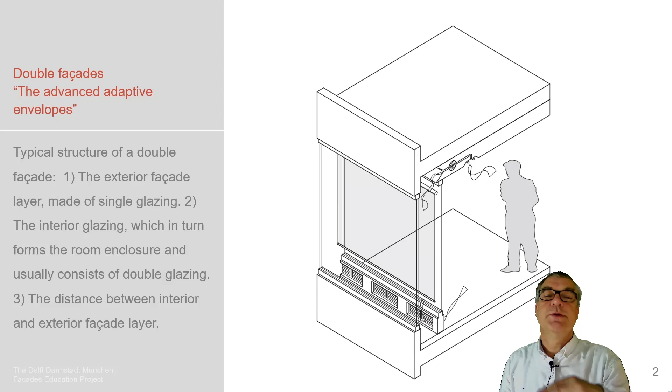The main idea is to have an outer layer, mostly a single layered glass layer, to create a buffer for an inner double-layered facade to prevent too much air movement, so that sunscreen systems could be simpler and easier positioned as one aspect, and as a second aspect to be a kind of glass house trap for sun, especially in the in-between periods, to allow a heat up of this inner cavity and then having this heated up air being used in the building as a system. This is the main idea of this type of facades.

We obviously have a history with that. The box window, here a sample from San Sebastian, which are small balconies made out of single layered outer layers of glass. Then there's an inner window, also a single layered inner window. And similar to what I explained for the modern double facades, this is used as a glass house trap to have sun heating up the in-between cavity, the in-between space, and then having this tempered air to be used at the inside as a system.

We can clearly identify that this whole activity with double facades and all the additional functionality which is brought into facades is linked to Lloyd's of London, where they developed it with this small sketch by Mike Davies. The idea of having all layers, all functions brought in this one system. So an outer layer to cover, a middle layer to collect energy. PV was sketched at that time. The opportunity to have something transparent and flip it to be intransparent, and then a heating system at the inside. He sketched that whole thing in 3 centimeters. And obviously, technically, there was no opportunity to get this done. But very engineering-wise, the problems were separated, and by separating these problems, they were able to solve this entire thing.

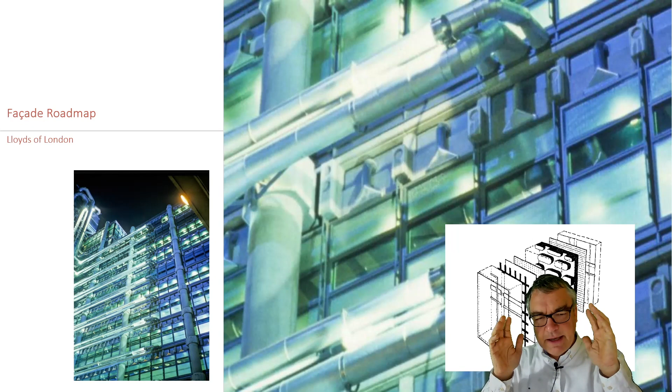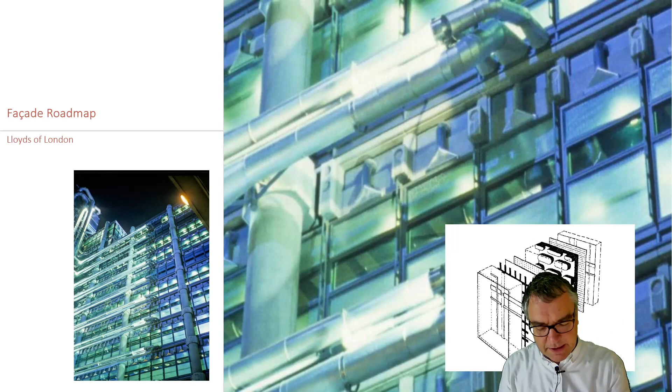So we see a ventilation outlet here. We see a ventilation inlet at the bottom part. We see some opaque areas which are light transmitting. We see some transparent areas which obviously allow the view to the outside. So the idea to get all these functions integrated in this one component, which did not work at that time technically, was then dismantled, demounted, and then brought in several levels in the same systematic. We can define this as the starting point of integrating function into facades which are more than just enveloping it.

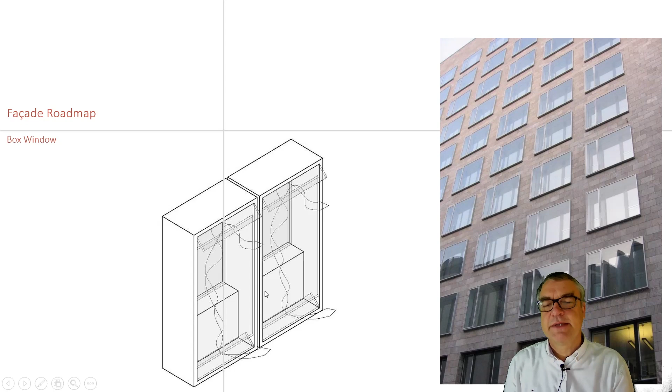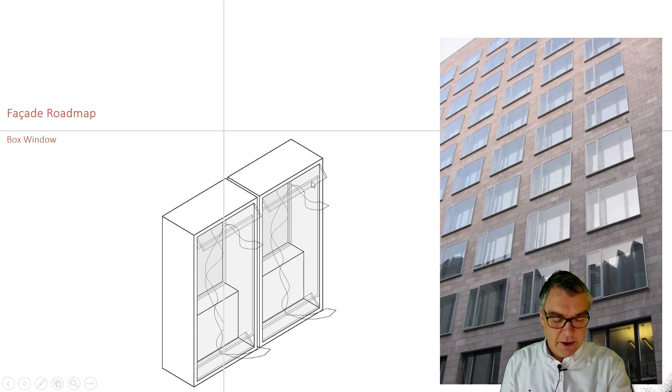Nowadays, we talk about the double facades, and we have a set of variations of these double facades. The boxed window, as already explained, this is the modern boxed window where we have a floor height box, which has some air inlets at the bottom, some air outlets at the top, and then this glass house as a trap for the sun to heat up this inner environment, and then having this heated up air being used at the inside, and also being an additional insulation barrier in the wintertime. You can obviously imagine that in summer, when it tends to overheat, you need to be able to have enough airflow to create a clear draft within the system to get rid of the heat which is within this double facade as a system.

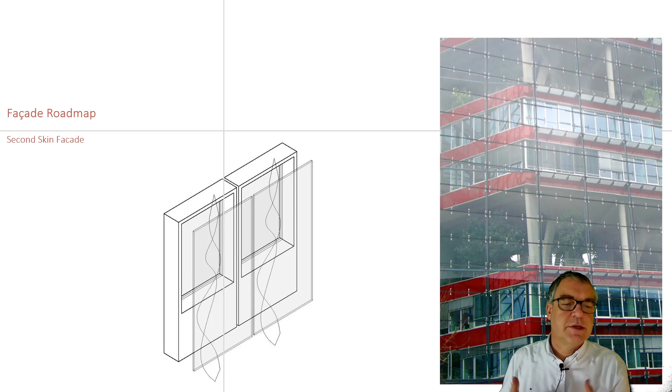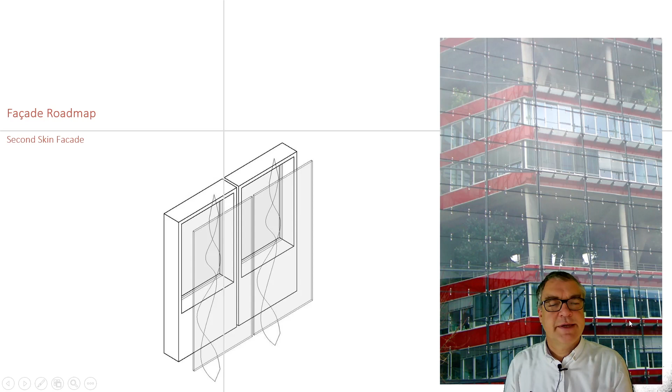Next level, most simple version of double facade, second skin facade. We see on the main picture the Double X building in Hamburg, a pure, quite simple normal building, concrete skeleton structure, and then an entire layer of glass in front of it, which is simply installed, technically not that complex to reach, which has an air inlet pretty much at the bottom and an air outlet pretty much at the top. And you can imagine that this creates quite a reasonable draft within this system, but it also creates the difficulty of having polluted air at the top part and less or better air at the bottom part. And especially in cases of fire, this tends to be quite complex. So imagine a fire here. This is something which you clearly need to keep under control and design wisely so that it does not appear as a problem.

This could be done differently by being able to entirely open this second skin facade, a concept which I personally like very much, because in this situation you're able to entirely open the system in summertime, so then it's a single layered facade, even with some shadowing devices, and in wintertime you entirely close it, and then you're taking benefit of the heated up air in the cavity.

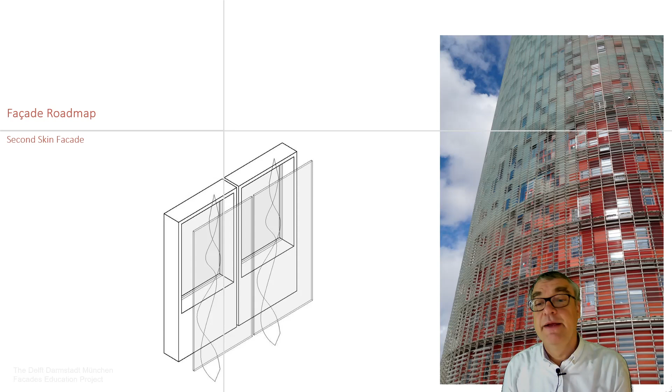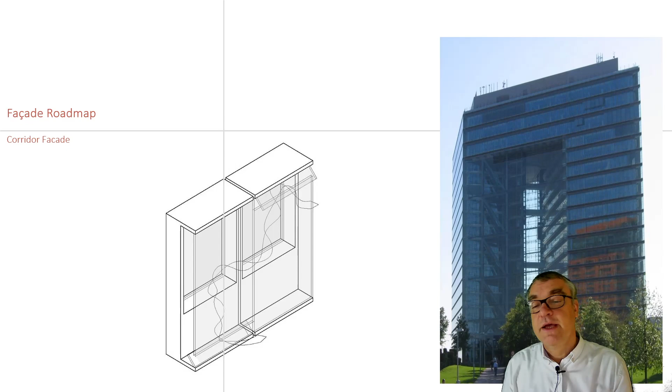Due to the difficulties of having an entire building in the full height being covered with one layer of glass, we developed the so-called corridor facade. Corridor facades, taking this picture, means this is one corridor of floor height, which has an air inlet at one point and an air outlet at the other point to prevent shortcuts between the different floors, and then air is heated up in here, used at the inside, and then leaving the building at the outside. This sample project, Stadttor in Düsseldorf, is one of the very first ones which was built, and we see the air inlet is in here, then the air is used inside, then the air outlet is at this point. And when we look at the section, we see it's a huge device with huge flaps to open and close.

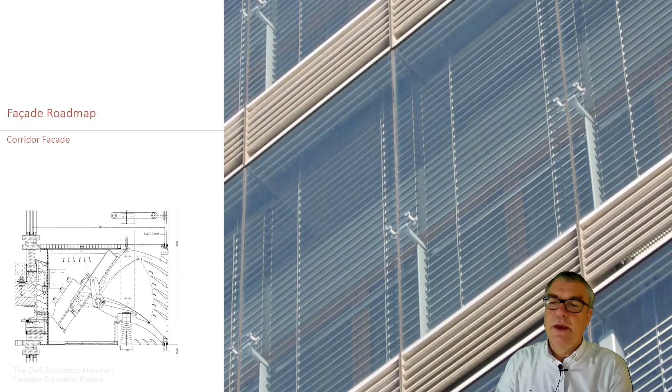This is a dimension of 1 meter. As said, one of the very early ones; we nowadays know a lot more about how this technically functions, so we can decrease this down to 30 by 30 centimeters. But at that time, this was the state of the art of the possibility to use.

When we look at the corridor facades, obviously the height of a corridor is the disadvantage; because of that we create less draft by temperature within this cavity, which ended up in the idea of a so-called chimney boxed window facade. Chimney in the means of having one chimney going for some 7 floors, again a project in Düsseldorf, ARAG, 7 floors chimney, which is penetrated by air, creates a certain draft within the system,

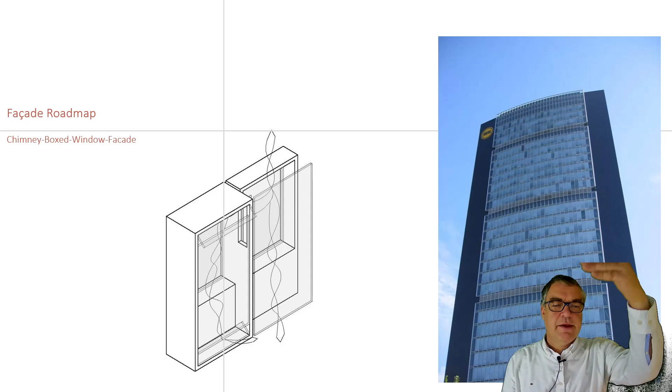and then next to the chimney each floor has boxed windows which have an air inlet, get this air heated up, used at the inside, and then get the air into the chimney, and by the chimney creating the draft to get the air out of the system. This is this facade in a close-up view.

You see the chimney goes through the system here. There's the next chimney, which is this one, and then this is a boxed window which has an air inlet here and then gets into the chimney, and then this is the other box window, air inlet here, and then it gets into the chimney as a system.

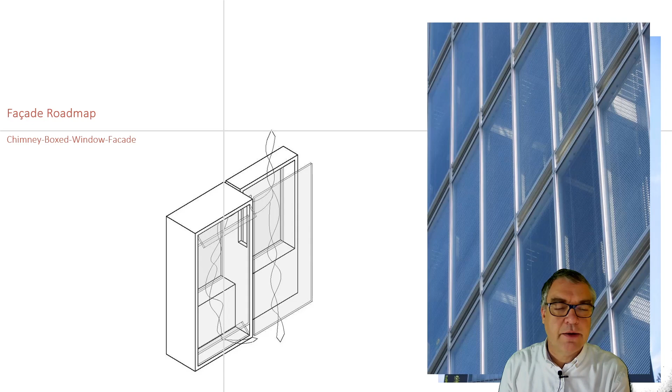Obviously, this is one of the most advanced versions to build and to deal with, and you need to maintain it well, you need to engineer it well, and you have to get it correctly linked to the entire service system of the building to work precisely.

Next solution of this type of setups is the so-called alternating facade. We have a double facade in this area, double facade in this area. It's a single additional layer of glass in front of it and a simple window next to this facade.

The double facade works well in wintertime, spring and autumn, but does not work that perfectly in the summertime. In summertime, you want to have a simple facade, and in this sample, the simple facade is done with an openable window and then a fixed sun shading device at the outside.

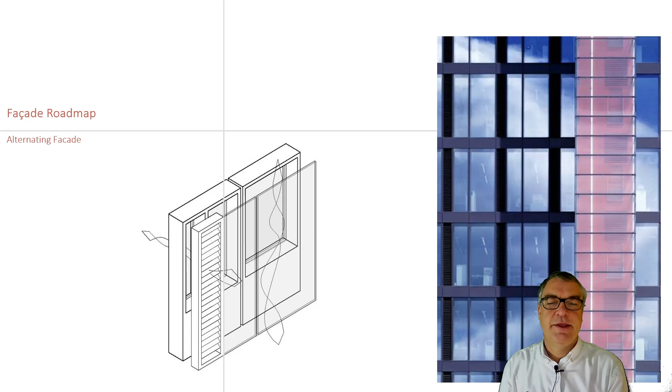Project is in Stuttgart. When we look at this range and how they developed the boxed window, the second skin facade, corridor facade, so having the problem of a direct draft within the surface, changing this into horizontal corridors, getting these two combined into the chimney and the boxed window, or alternatively having an outer layer of glass for the double facade and then a simple window to be added.

And obviously, but that's the next lecture, the next step would be to add other service functions to this facade, which we will see in some later projects, Posttower in Bonn, where for the first time all the service devices, the HVAC system, were added to this type of facades.

Difficulties which we do have with double facades, no reason for not mentioning. Obviously, it's an additional layer of glass, which means additional costs in installing it, getting it built. But secondly, also additional costs in maintenance. You need to clean another layer of glass. But there are other aspects which have to be taken into account.

We are dealing with a kind of conditioning unit for the building, and if this conditioning unit, which helps to condition the building to its purpose, is used as, say, an additional balcony with a secure situation, that's not a very nice one.

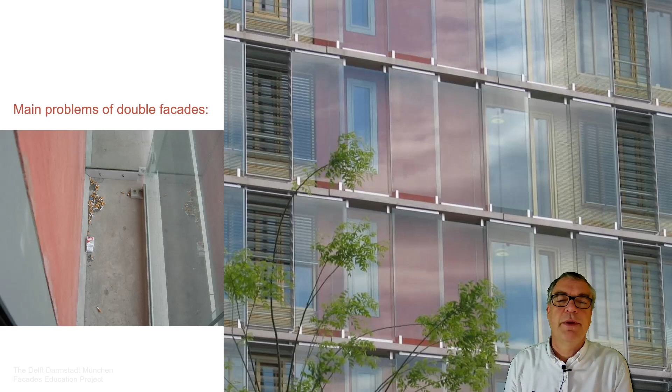This is a sample in Frankfurt, where they actually use this inner space as a smokers' zone. And if you think that this inner space is actually the lung of the system, it's not very nice to have the smokers using it. So misuse of this type of systems is something which really can be a difficult aspect.

Another one, acoustics. We have an inner layer of facade. We have an additional outer layer of facade, even if it's single glazed. This is quite a hard surface, and any noise reflection from one floor to another floor or from one office to the other office tends to be a problem.

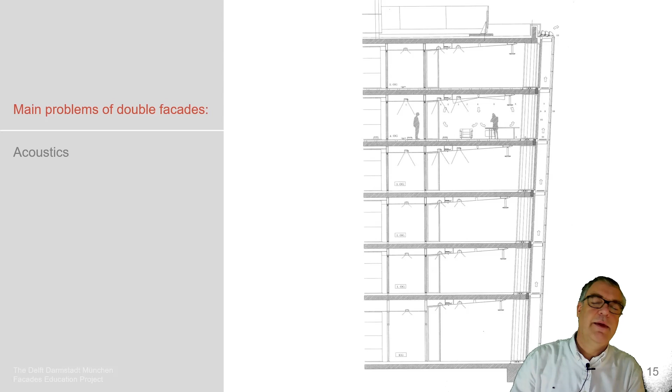So we have to clearly engineer this in a good manner to make sure that there's no cross reflection between the one floor and the other floor, or the one office and the other office in this system. Clearly identified a problem which happened. And then obviously also the overheating.

So if we create a glass house, and we like to use the preheated area in between in winter, for example, we have to make sure that there's enough ventilation to always get fresh air and to allow to use that fresh air. But if it gets too hot, this may overheat.

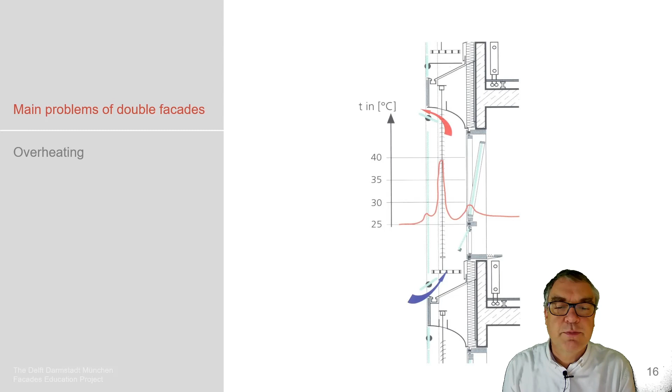So we need to make sure that, especially in summertime, the overheating is prevented by enough air outlets. So there needs to be a good draft of air flow in the system, which is the one aspect.